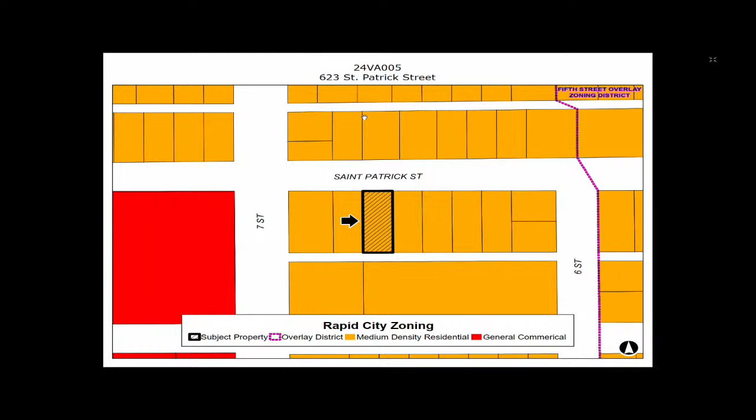The property is zoned medium-density residential district. Future land use is urban neighborhood. The property is accessed by St. Patrick Street, which is classified as a principal arterial street on the city's major street plan.

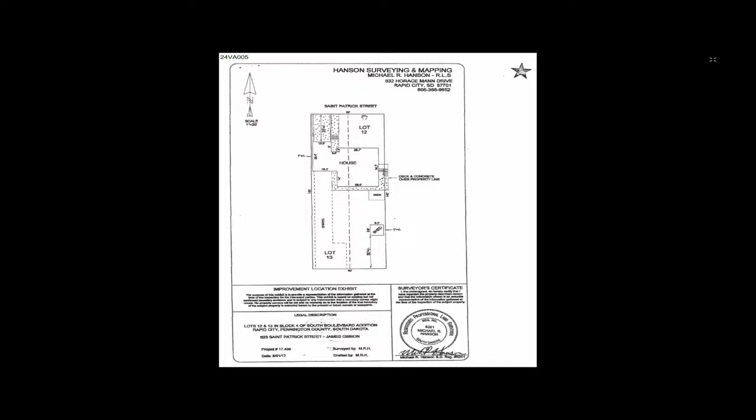This is a survey of the property. The house is set back approximately 5 feet from the east property line. It contains a side entrance, accessed by small landings and steps, which encroach onto the neighboring property to the east. That small landing and steps to the side entrance is located within an encroachment easement. This is a closer view of that access to the side entrance.

This is the existing elevation drawing. It shows the concrete steps, the concrete landing, and shows that encroachment easement as well.

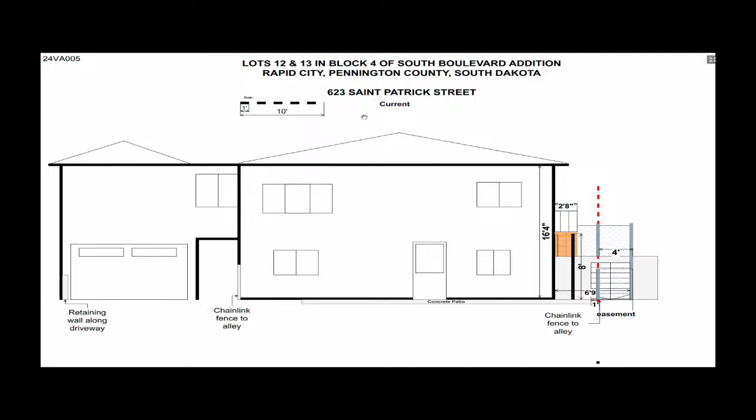This is the proposed site plan. The applicant is proposing to build a 300 square foot deck. He'll be set back about 1 foot, or exactly 1 foot off the property line, and provide a new access to that side entrance so they don't have to rely on that easement.

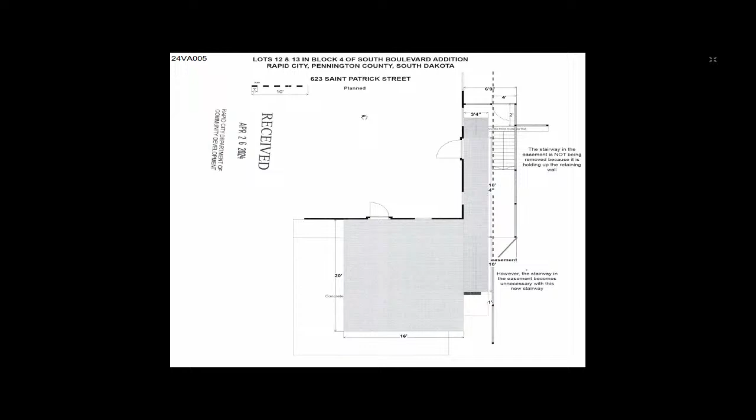This is just a closer view of the deck. The applicant did note that construction of the deck will begin the process of removing that easement and returning that land back to the property owner. So staff finds this is a special circumstance that justifies approval of the variance.

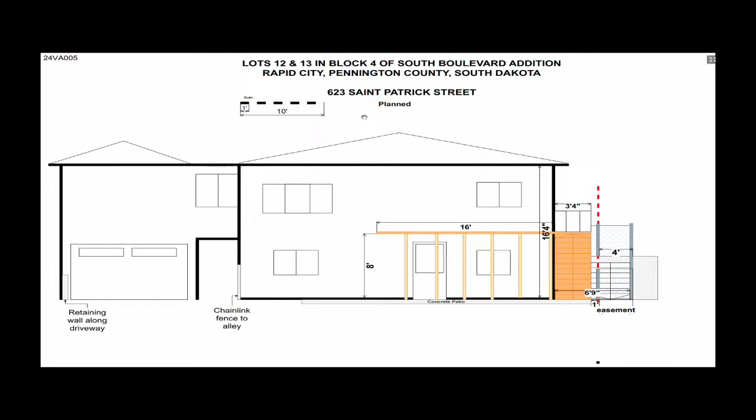This is the elevation drawing of the proposed deck. The minimum separation required in the zoning code between a deck and an adjacent dwelling is 10 feet. This deck will be set back 7.5 feet from the sidewall of the neighboring dwelling. Therefore, staff is recommending that this deck and the steps be built out of fire-treated wood or some other non-combustible material to address that reduced separation between the neighboring home.

Staff is recommending that this variance request be approved, considering that it'll begin the process of removing that encroachment easement. The deck doesn't appear to detract from the character of the neighborhood, and fire safety concerns with the reduced separation between the dwelling will be addressed with non-combustible building materials. And with that, I'll stand by for any questions.

Since I don't have any speaker request forms, does anyone on the Planning Commission have any questions, or Zoning Board of Adjustment? Item 2, Mr. Chair.

I'm going to figure this out, Vicki. I've got it, thank you.

In this circumstance, because this house was built in the 40s, this is back before we had the setback requirements that we have today. Unfortunately, there is a structural encroachment onto the adjacent property. That in and of itself creates the unique circumstance that sets it aside from some of the other requests that you have had before you.

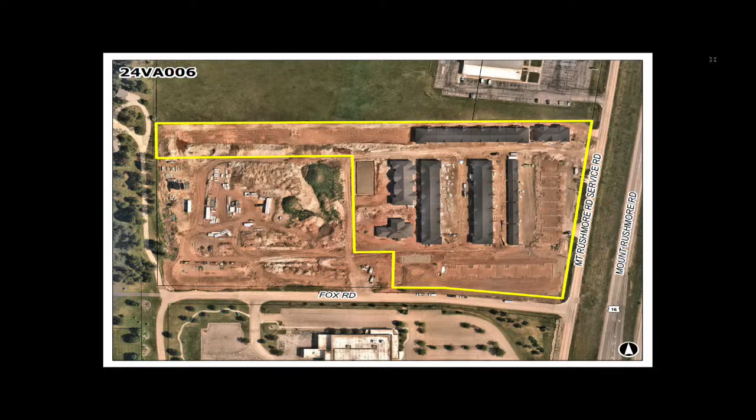This is an application brought in by the South Dakota Department of Transportation on behalf of the property owner at 1900 Fox Road, which is the Altitude Apartments currently being built on that property. The property is in the office commercial zone with an employment future land use designation in the future land use plan.

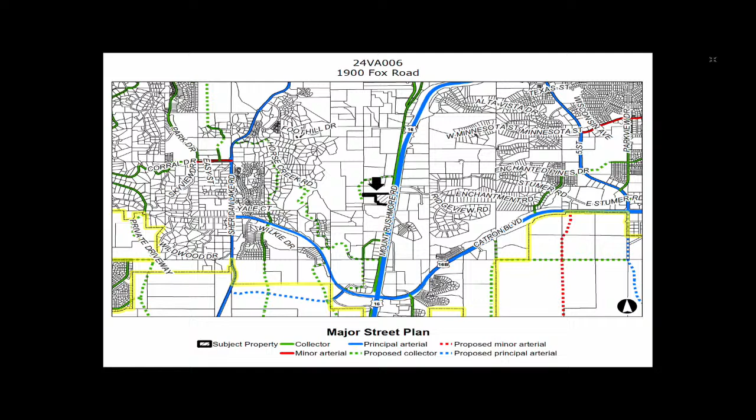It is off of the service road that's on Mount Rushmore Road, right off of that at Fox Road, the area we're talking about in the front south corner, the east southeast corner of the property.

I do want to note the purpose of the request for the variance. There is an interchange improvement at Catron and Mount Rushmore Road that's going to be going in the future. Because of that improvement, there is a need to adjust some of the other intersections along Mount Rushmore Road, including the service road and some of the perpendicular roads there as well.

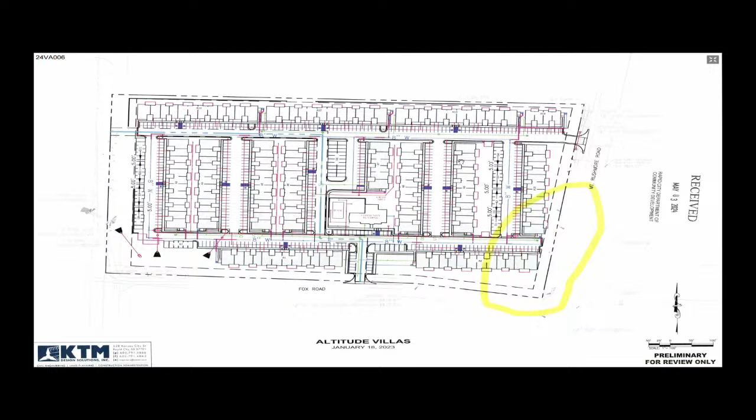So this is one of the intersections that is looking to become a full intersection. They're actually moving the Table Rock Road intersection to Fox Road and making it a full intersection instead of controlled. So there are spacing requirements required between the two intersections, one at Mount Rushmore and then at the service road on Fox Road, for safety purposes.

The distancing requirement is a minimum of 150 feet. They also have some level of pedestrian facilities that are needed along the road that would take up some of that space as well. The purpose for the variance is to be able to set the 150 feet from intersection to intersection and include a 6-foot curbside sidewalk as well.

So in needing that space and that separation, they're going to start encroaching onto that property at 1900 Fox Road. After acquiring the right-of-way needed for the project, the setback for the building that is already built—not occupied yet, but it has been built—is reducing the front setback from 25 feet to 14.68 feet on the front setback. So that is what the request of the variance is, the purpose.

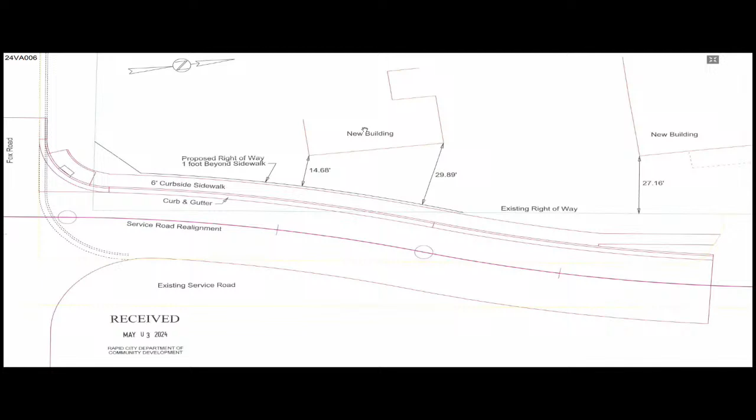So there's a large benefit to the community by going forward with the road projects as proposed, with the safety features in the plan, and there's not necessarily a detriment to the property owner here. They still maintain a reasonable setback.

This is looking at where the setback reduction is. So this intersection would move west, looking kind of northwest here, so it would move more toward the west side of the property.

This is looking north, again moving more toward where the power lines are. They'll reconstruct that road and add those safety and pedestrian features as well. And so this intersection would become, again, a full intersection moved from Table Rock.

This one is looking southwest. And you can tell from this, there's room there to encroach a little bit more in. So it would be about a little more than 10 feet more than the setback is today. And then imagine the pedestrian features that would be added to the road in addition to the improvement on the roads. And this is looking east toward Mount Rushmore Road.

So in conclusion, this is a unique situation that benefits the greater community. There are special circumstances here with the larger road construction impacts that are happening, and any impacts could be mitigated in this regard. So staff recommends approval of the variance to reduce the front setback from 25 feet to 14.68 feet.

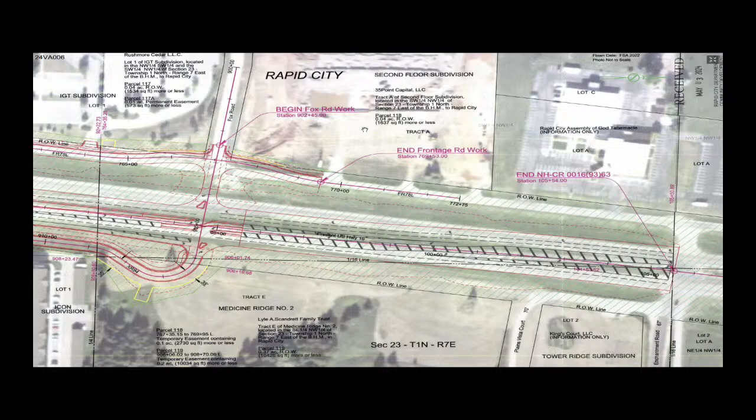And that being that close, I guess that would be a concern for the safety part of it. Mr. Chair? Vicki? At this time, that is a front yard. If this were a rear yard or a side yard, their open space area for outdoor play for children is identified on the back side of this. Many of you remember when they first came in with this plan development for this project and the neighborhood input, and it actually got appealed to city council and so on and so forth. And part of it was they needed to show the neighborhood that they did have preservation of that open space and that it would be a safe place. I think the fact that this is a service road and not the actual Mount Rushmore Road full movement also eliminates the need to require a fence in a front yard at this location.

Maybe would it enhance some kind of an obstruction so that I know my grandchildren, they come out the front door, back door, it doesn't matter, they're on a full run. And some kind of an obstruction with this that close, I think for safety, it just seems like they would have something that would slow them down at some point.

Mr. Chair, if I might. Mike, I think you make a good point, and we can certainly reach out to the property owners. I think maybe some landscaping along that area might be a better solution than trying to stand up a fence in the front yard. But certainly that's something we can have a discussion about. Okay, thank you.

Are there any further discussions? I look for a motion. We have a motion from Brooke to approve with stipulations. Do we have a second? Mr. Chair, if the motion maker would also add, based on the special circumstance created by the need for the right-of-way.

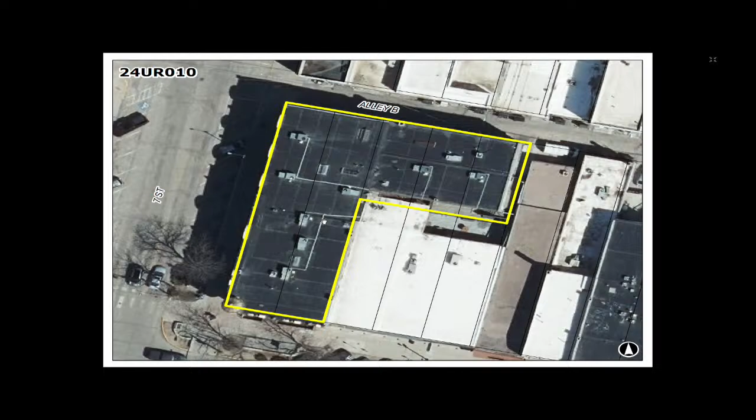So they are proposing to sell beer and wine to customers. Let me go through this first. They're in the Central Business District, our zoning district most common for these types of establishments. It is in the downtown future land use plan, sited by two arterials with just a local street going across on 7th.

This is what they submitted with the application, showing where they're located. Sorry, this one's a little hard to see because we have to scan in stuff, but the bar facility is actually in the front of the business, and then there are stations and everything separate on the backside and the north side of the building as well. So they are proposing to sell beer and wine to customers while they wait, and they have this area where they can sit and do so.

The plan is to operate at most between 9 a.m. to 7 p.m., and that would be the hair cutting hours. So they are just assuming that they would have the on sale open whenever at that time. I don't know that we're going to come in at 9 a.m., but that would be Monday through Saturday. Right now, they operate in pared down hours, but they would assume that would be their full hours. So that was what was submitted with the operations plan.

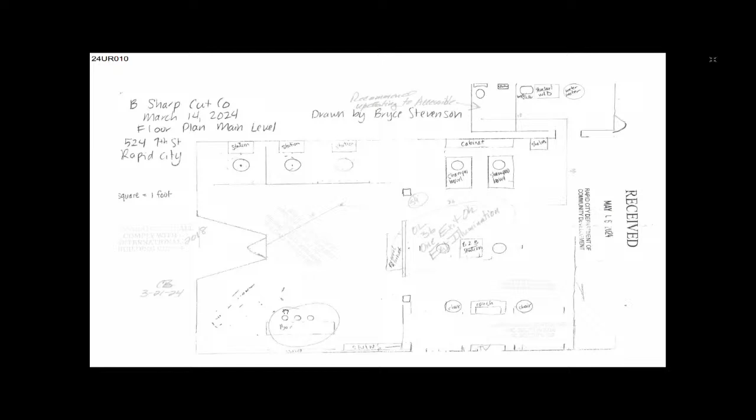And again, noting it is in a separate section than where the hair cutting area is. This is looking southeast on 7th Street at the street front where they're located, northeast. You can tell this area is completely commercial - there's shops, restaurants, and other businesses around, banks, retail, and other things like that.

This is looking southwest and northwest, so it is in an area of downtown commercial development. Other businesses like this are in the area. They actually had this business approved in another location not too far from here as well.

So staff is recommending approval with the stipulations noted at the end of the report. Let me know if you have any questions. Thank you.

The chair recognizes Mike Quasny. Thank you, Mr. Chair. So there's nothing really that's changed - they're just moving. There would be no reason to believe that there's anything that would affect this. Correct, and I will note the hours that were approved - they're asking for reduced hours even than what was approved with the previous conditional use permit at the other location.

Okay, well, I would make a motion to approve with the 3 stipulations that are noted at the end of the report at this time. We have a motion from Mike Quasny and a second by Karen.